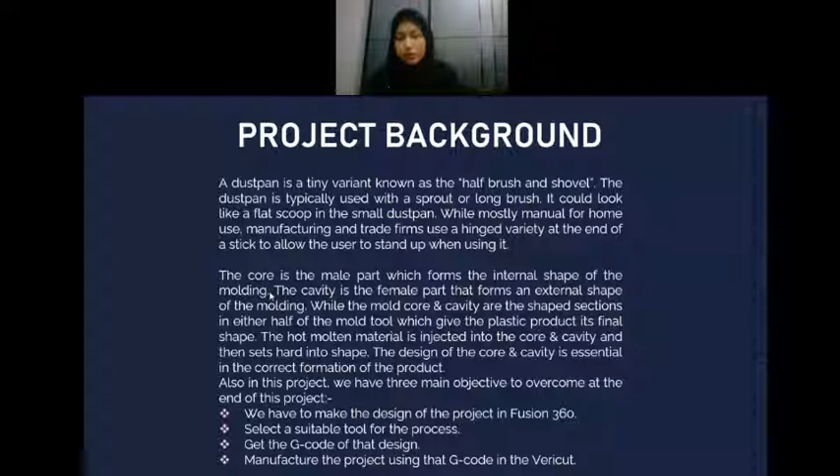It uses a hinge variety at the end of the stick to allow the user to stand up when using it. The core is the male part that forms the internal shape of the molding, while the cavity is the female part that forms the external shape of the molding.

The mold core and cavity are the shaped sections in either half of the mold tool which give the plastic product its final shape. The hot molten material is injected into the core and cavity and then sets hard into shape. The design of the core and cavity is essential for correct formation of the product.

In this project, we have three main objectives to achieve by the end: firstly, to make the design of the project in Fusion 360; secondly, to select a suitable tool for the process and get the G-code of that design; and thirdly, to manufacture the project using that G-code in Vericut.

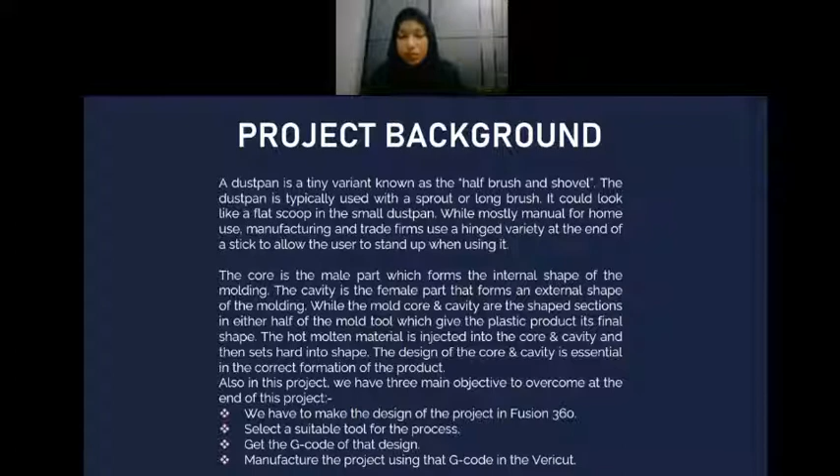Next, I'm going to explain the distribution of tasks. Firstly, the design of the project part was done by Umi Nuur Khalidah. Second, the tool was produced by Nur Azirani. Third, Vericut was done by Nurul Izzah, and the slide presentation was done by me.

But all the brainstorming and discussion for any kind of problem or anything we didn't know were done by all members. So that's all from me.

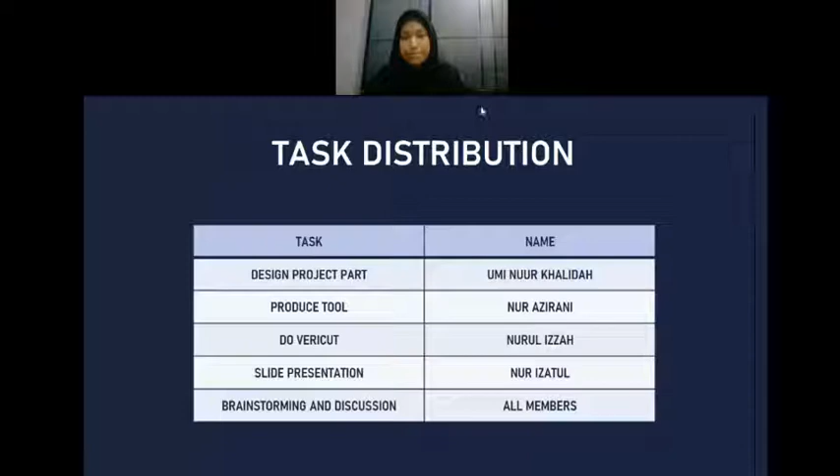I will continue this presentation with the project findings in Fusion 360.

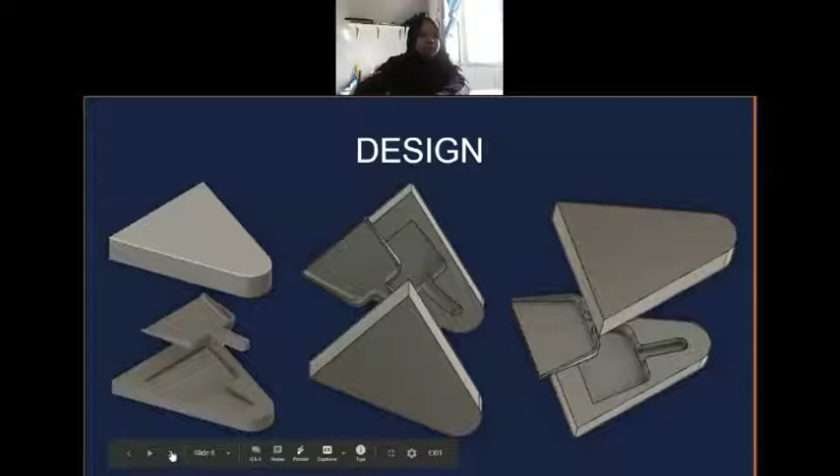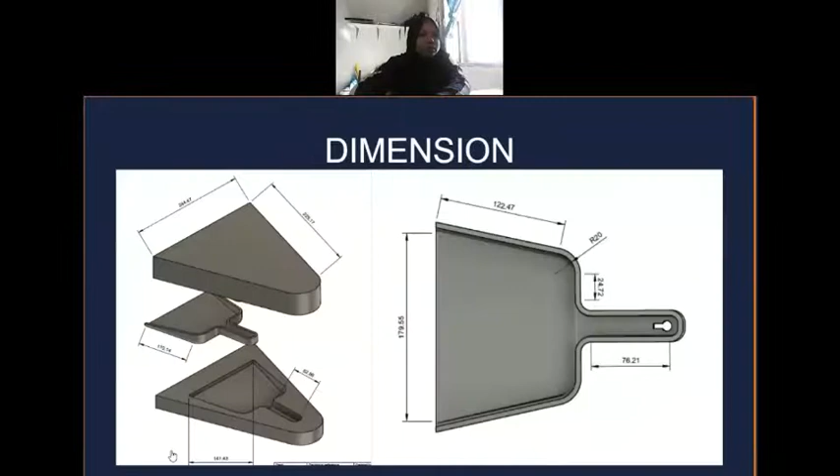This is our view for the model and mold. This is our finished model, showing the home view, back view, and front view. This is the dimension for our finished model, and this is our tool placement and alignment.

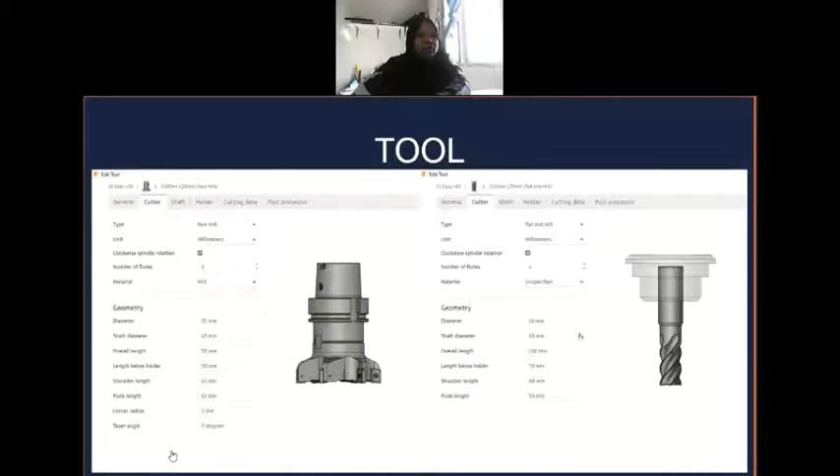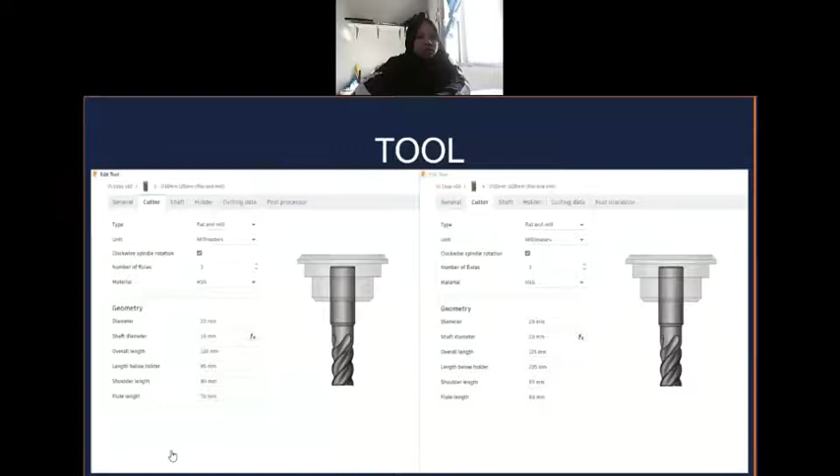For placement in the cavity, we used a 20 diameter flat end mill. The flat end mill used for pocket and contour is a 10 diameter in cavity mold. This is the flat end mill, 10 diameter for contour in the core mold, and also 20 diameter for pocket in core mold.

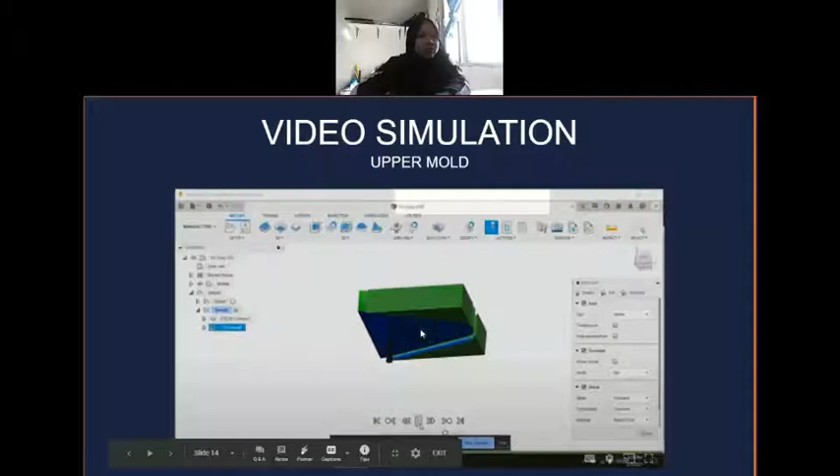This is our video simulation for the lower mold, and this is the video simulation for the upper mold.

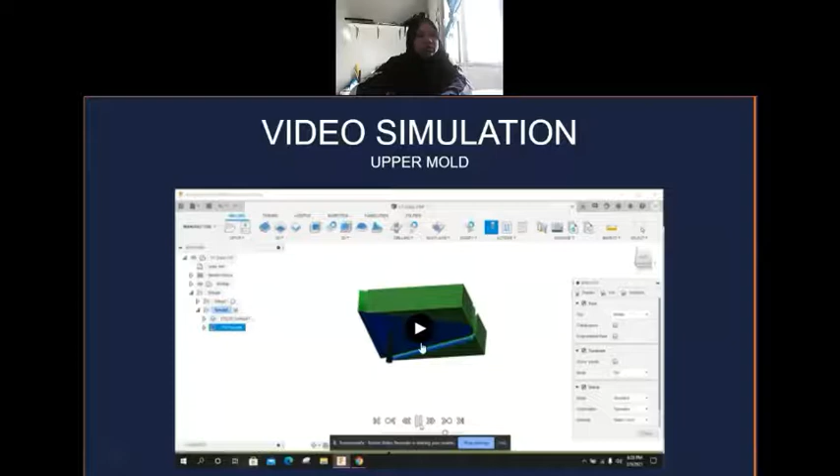I would like to present about the project findings.

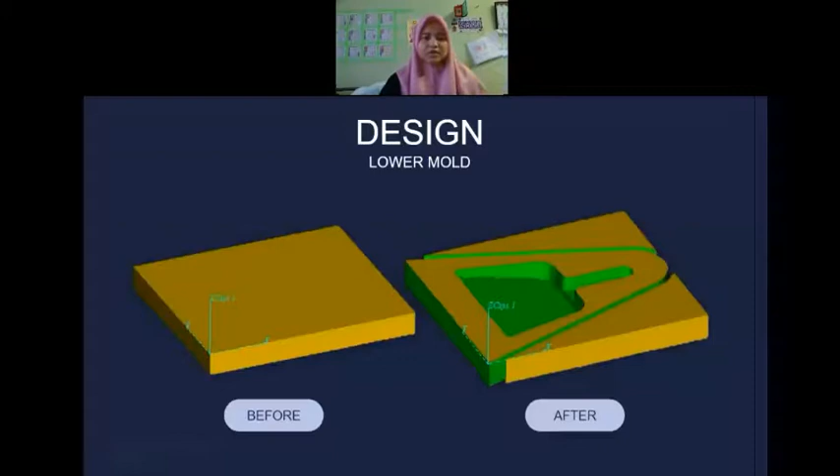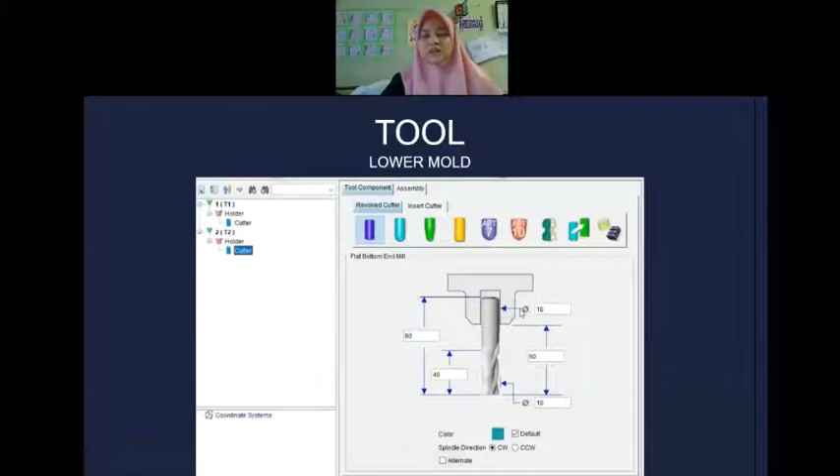This is our design for the lower mold, before and after. This is our project for the lower mold, showing two tools used. For the first tool we used a 20 diameter, and for the second tool we used a 10 diameter. This is the video for the lower mold.

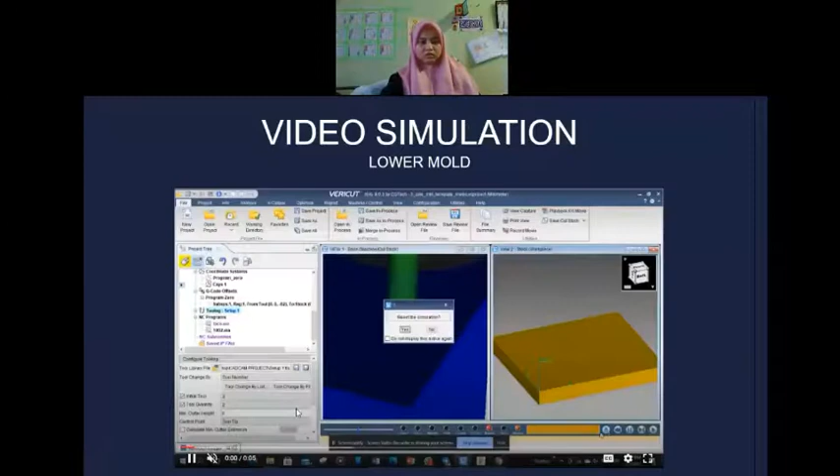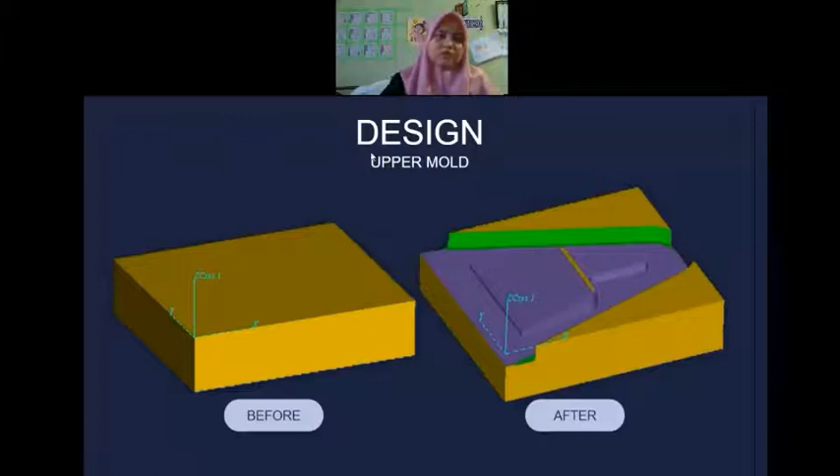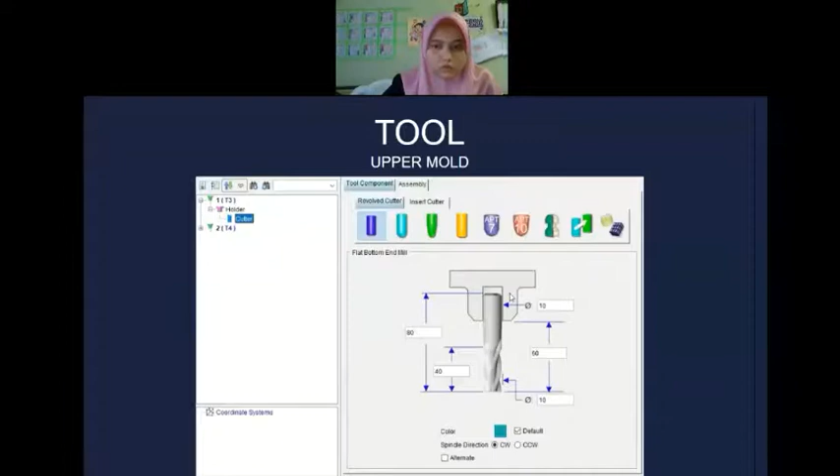And this is the design for the upper mold, before and after. This is the project for the upper mold, showing the tools used. The first tool we used was a 10 diameter, and the second tool was a 20 diameter. This is the video simulation for the upper mold.

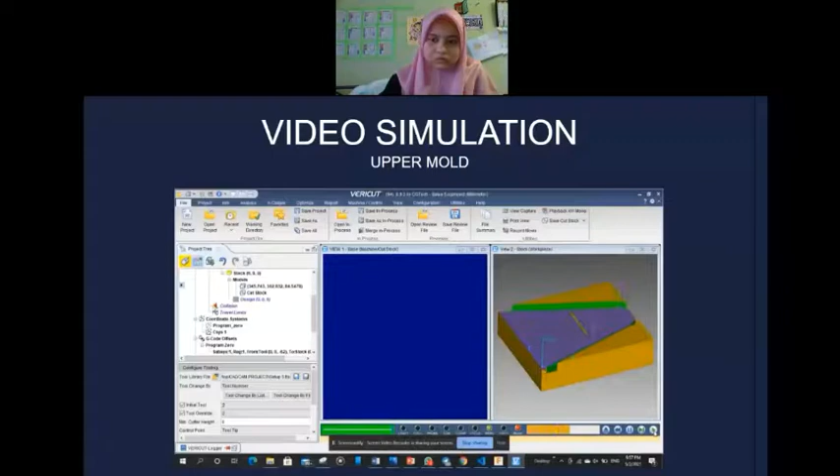As for the conclusion, we can say that at the end of the project, we gained knowledge and successfully understood how to mold the shape of a product using the design of core and cavity to achieve the correct formation of the product. This project also, to some extent, helped improve our skills in using Fusion 360 and Vericut software.